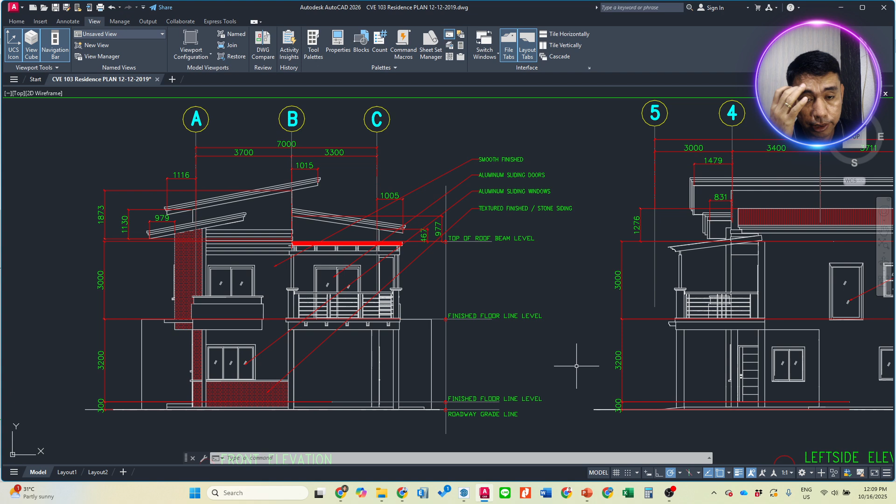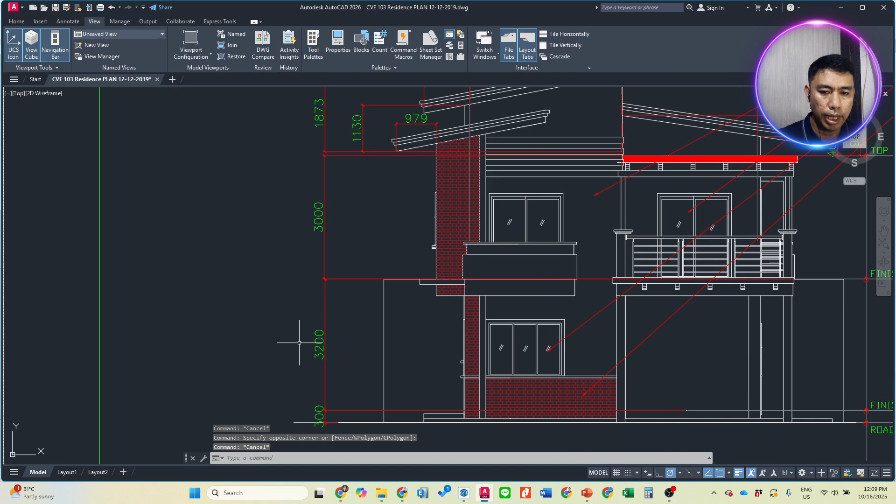After finalizing our floor plan, we now proceed to the elevation views. I already discussed this in class about what items you will see in the elevation views: the elevation of our building, the dimensions like mostly heights, the grids corresponding to our floor plan, and the annotations of the type of materials we're using or the type of finishing on the exterior surface of our building.

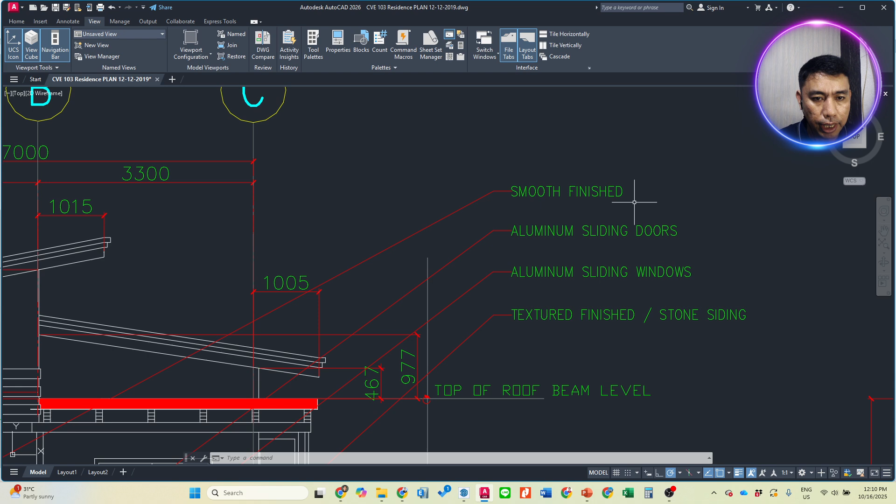For example, here we have smooth finish, we have to specify those types of finishings, what are the types of doors. So I have here aluminum sliding doors. And then we have, if you want, stone sidings like this one.

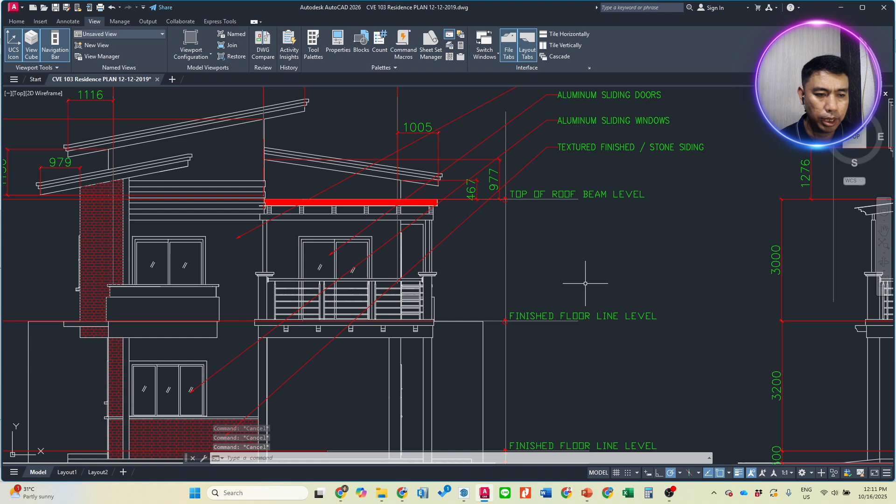This elevation annotations or elevation grid lines, I already discussed this one. As I've said, you can do it manually in developing or drawing your elevations based from your floor plan. But I told you it will be easier if we draw the 3D model of your building and then generate the elevation view from it. It's like working backward.

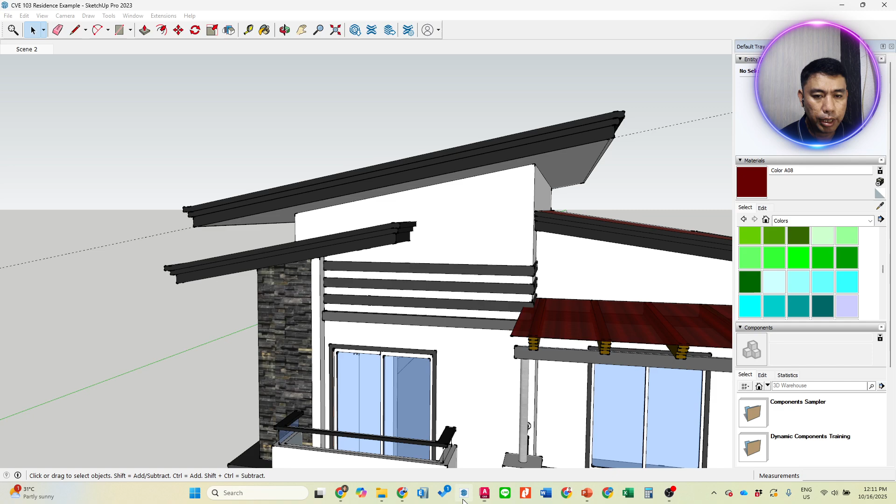So from our SketchUp model, assuming this is the SketchUp model, after finishing the SketchUp model, then we will generate the elevation view from this model. So how do we do that?

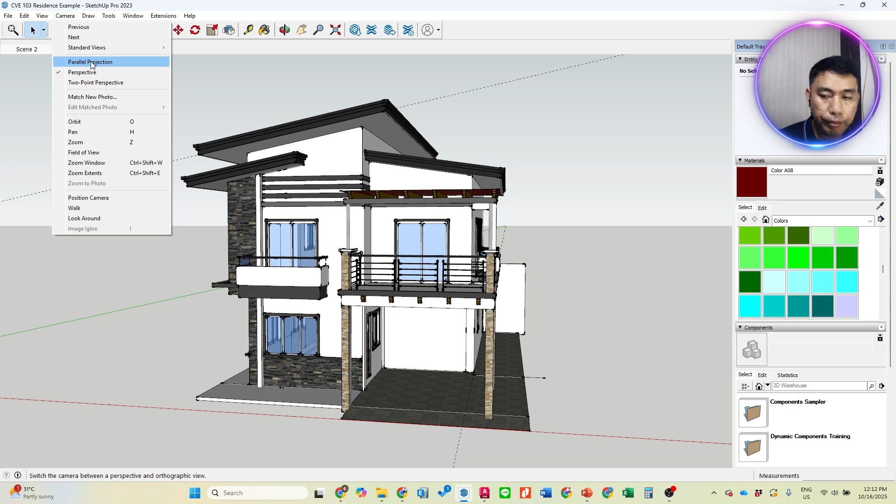Make sure that the perspective is not in a perspective view. The camera should be in parallel projection. So you go to camera, and then you have to check parallel projection. This is now in parallel projection. It's like it turns into a simple isometric view rather than a perspective view.

After that, you go back again. We will generate the front view, the side views, the rear view, and even the top view for our roof plan. We will start with the front view. Click on camera, then select standard views, and then you can select whatever side you want. Let's start with the front view. It turns now into front view.

By the way, do not rotate this one, because if you rotate, the angle will change. So you can zoom in, zoom out, but do not rotate.

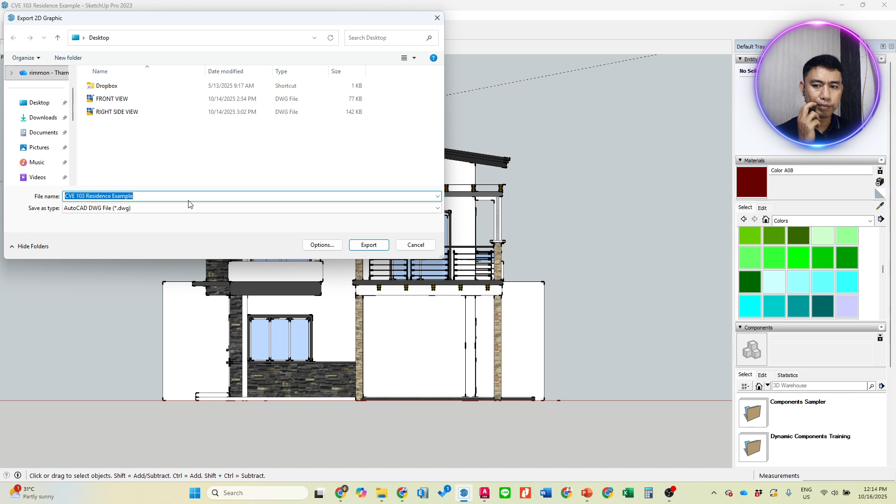You go to file and then export. Click on export, then 2D graphics, and then you choose a folder where you want to save this one, or you can choose the same folder as the SketchUp, and make sure that this is saved as an AutoCAD DWG file. Select AutoCAD DWG file, then you can change the name. Let's say I already have here, I'll say this is front view, and then you click export.

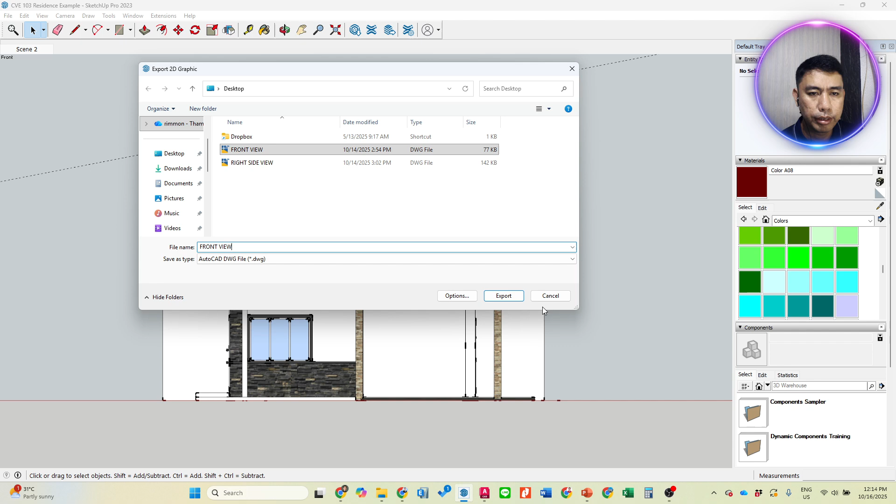Now I already exported this one, but you can click export, then click Export. Once you have clicked export, then you go to the folder where you saved that exported view. For me, I saved this on the desktop, so front view. I'll open that file. So this is now the exported view.

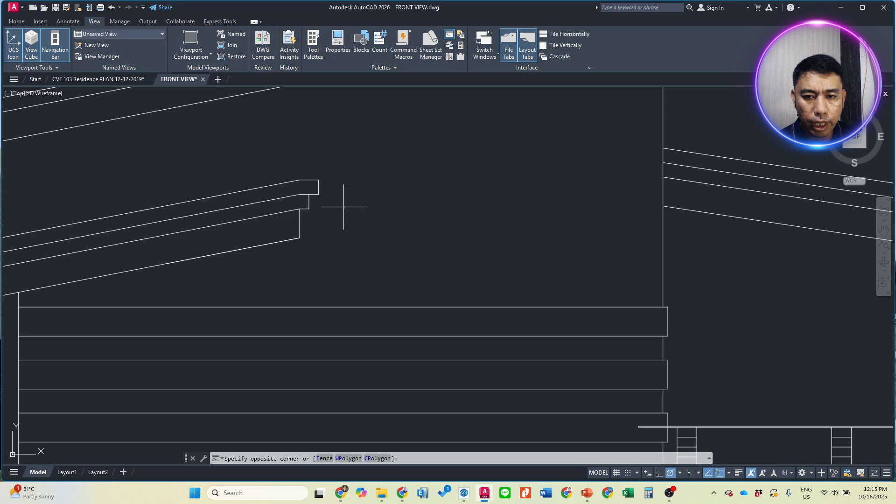Take note that in the exported view, these are just simple lines. So if you want to enhance this one, you can change the color, you can just do it manually. This is not in black, so I will select all of this and then Control C.

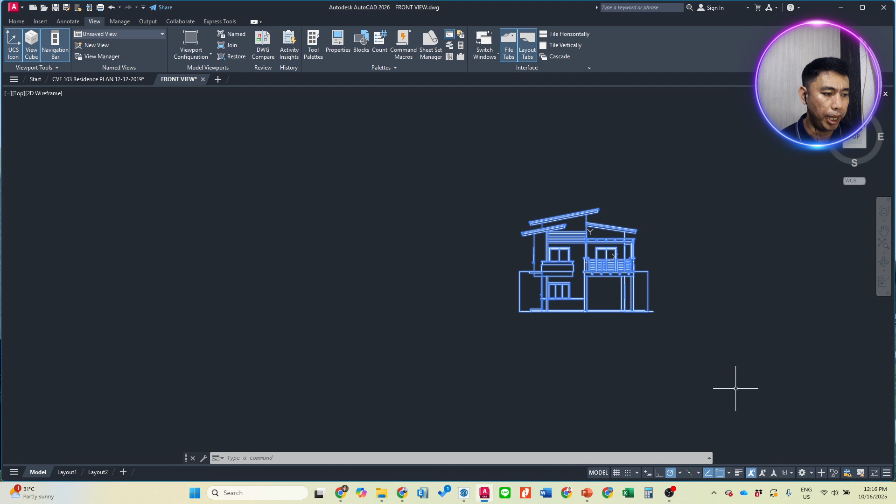We will copy this one to our floor plan file. In copying, you just select this one and then Control C, and then go to your floor plan file, and then just beside the floor plan you can paste with Control V.

Now, for me, I noticed sometimes when you Control V, you won't see anything, just a dot, because the scaling is too small since it's set in millimeters. So if you only see a dot, do not click any insertion point yet, and then you type SC, then enter. It's like setting the scaling.

So you can set the scaling, type 1,000 — only if it's too small, otherwise don't. For me, it usually shows directly at 1,000, so no need to scale. But if you don't see the house appear when you Control V, then you have to type SC, then 1,000, then enter. Once you enter, it will change.

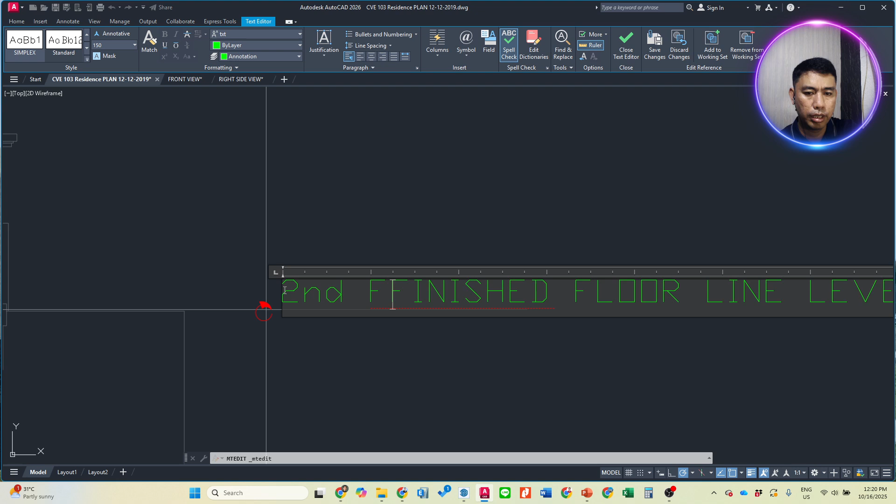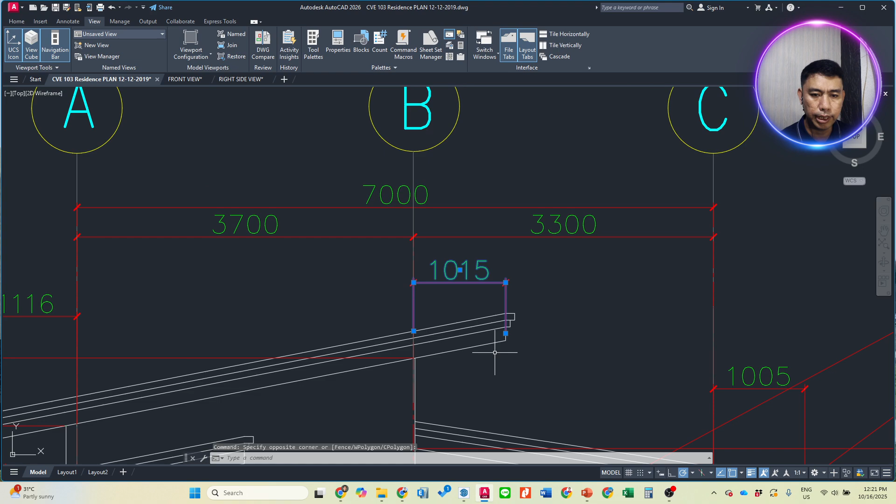And then the other dimensions, the special dimensions na wala sa grid lines, you have to put this one, like this one, this extension, roof extension. Yan. Okay, and then the type of finishings. So you do it for all of the elevation views.

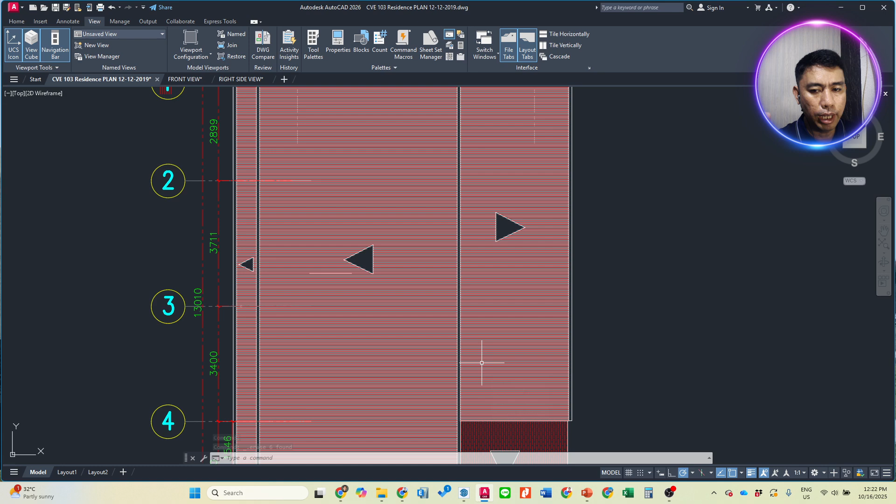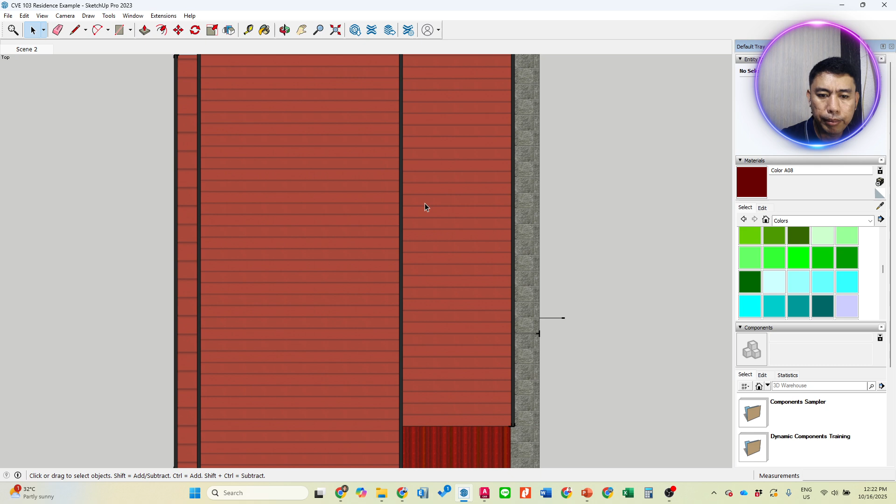So let's try, I will try to go to camera, standard views, top. Yan, dito yung top view. Okay, let's try na export 2D graphics, and then I'll say top view or roof plan, and then export.

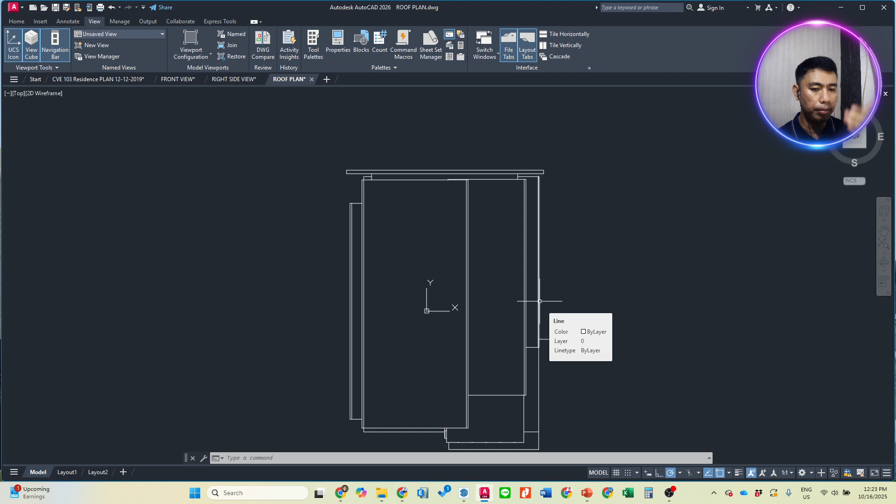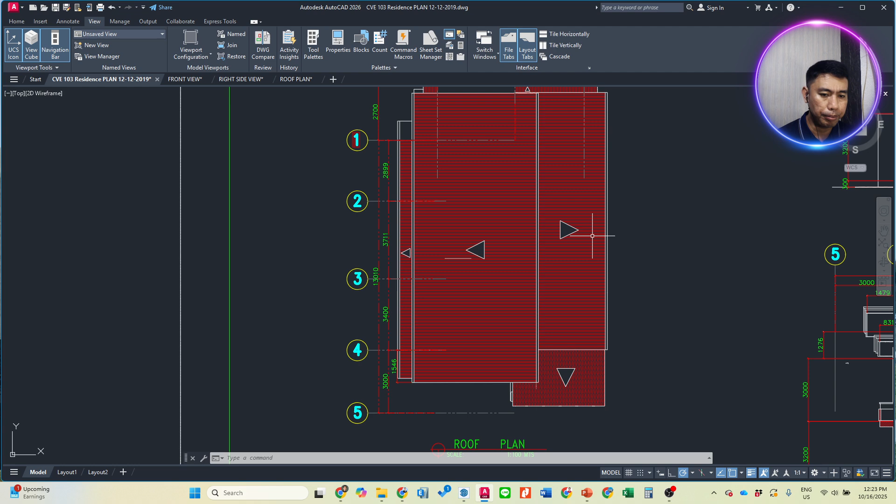I already explained that in the classroom, yung paano maglagay ng hatch, paano yung direction ng roofing. Just like this one, ito yung mga triangles, meaning sloping toward that direction. You can put triangle or an arrow. At least yung sure naman na yung edge ng triangle, is that isosceles? But anyway, yung edge, yung pinaka matulis na angle, dapat doon naman yung direction ng slope ng roof natin.

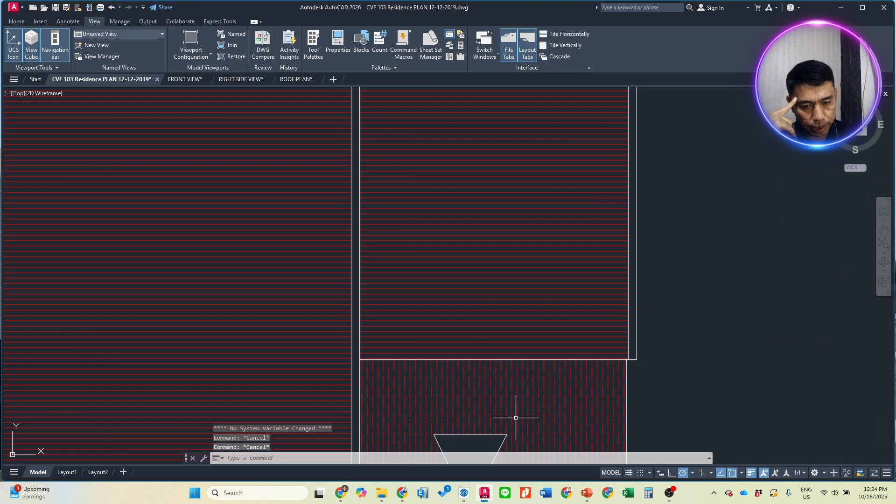So it should be, you can put arrow or just like triangle this one. And then after creating the arrow triangle, then you can put your hatch. So I believe you know how to create hatch and use different types of materials in hatch.

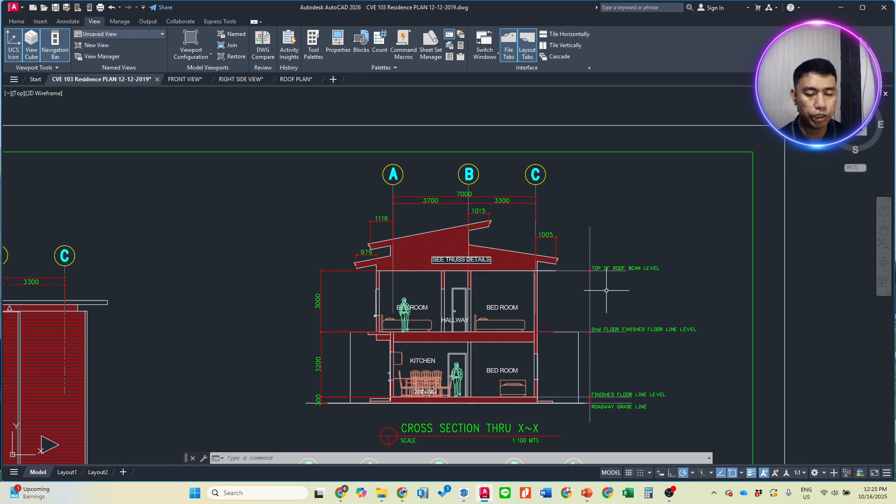All right, now there's one thing I would like to add is the cross-section. So cross-section view, kumbaga hatiin natin yung bahay and then we will see ano yung nasa loob ng bahay. I-cross natin yung bahay. So the good thing is, madali lang ito sa SketchUp, kasi if you have your 3D model, okay I will change now to,

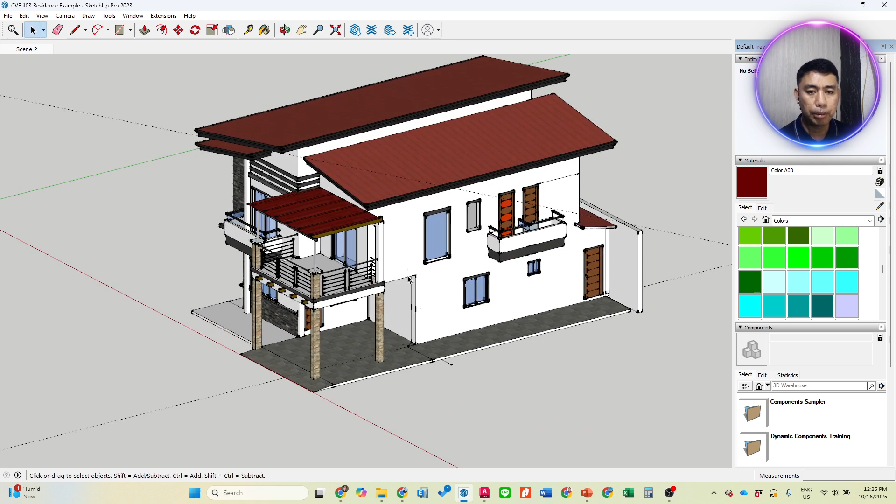okay, anyway, I will, you can rotate this one, I will just rotate this. Nasa parallel projection pa rin tayo, wala sa perspective. Okay, so we will create a section plane na mag-cut siya sa building, so or cut sa ating model. So you go to tools, and then section plane.

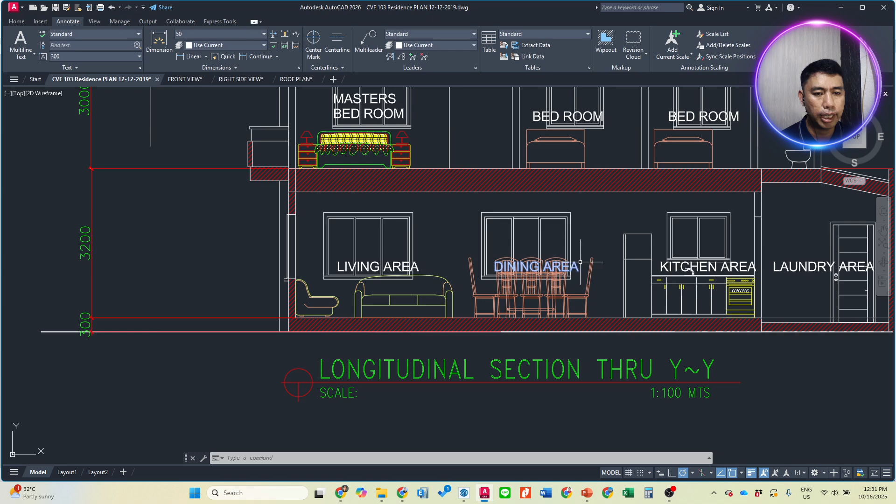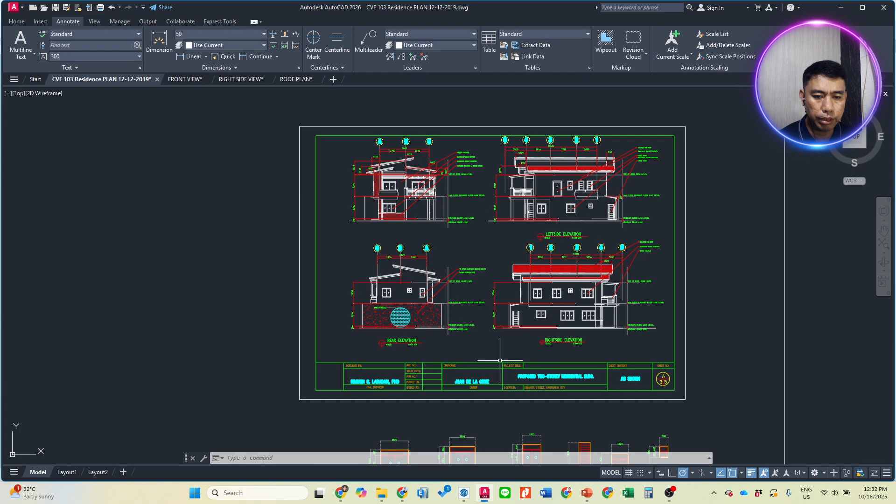So on your next submission, I want to see the elevation views, the four elevation views, the roof plan, and then the section views. You have to submit this by next week.

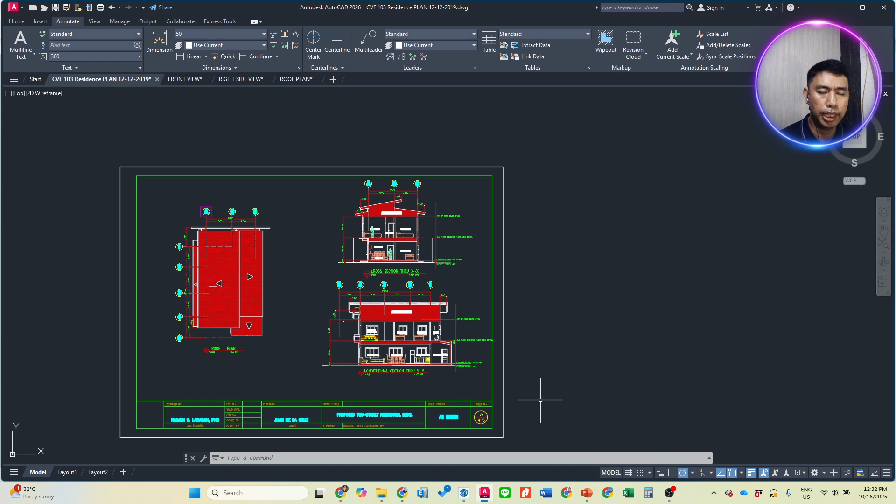So for section YZ, it's gonna be on Tuesday. And then for XY, DE and FG will be on Wednesday, to give you enough time to prepare for the elevation view and section view, including the roof plan.